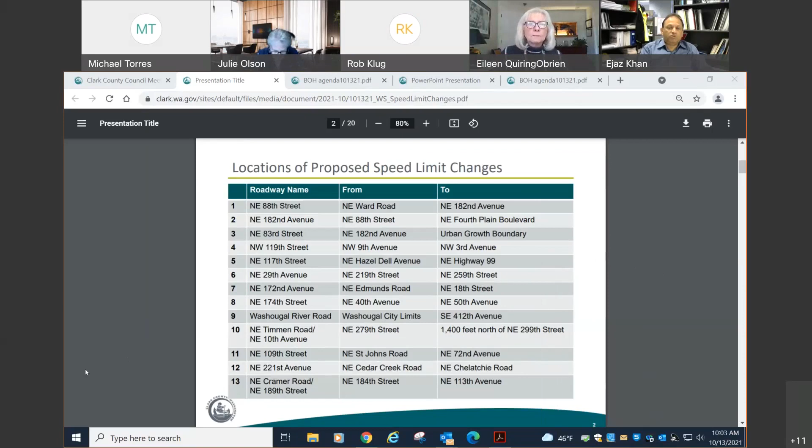We're going to talk about 13 corridor segments in Clark County that we are recommending changes in regulatory speed limits, and we will talk about each one of them individually. Next slide, please.

This is an overview of the segments in Clark County where we are recommending changes in speed limit. Next slide.

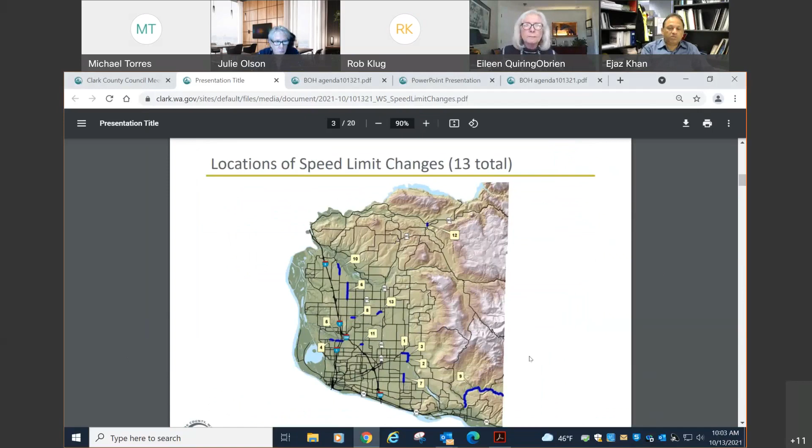So under state law RCW 46.61.400, the maximum permissible speed on a county highway is 50 miles an hour. That doesn't mean you can drive at 50 miles an hour. You can drive up to 50 miles an hour subject to conditions.

The majority of the rural highways in the county are basic rule, meaning it's unposted speed. The reason for that is there are so many vertical and horizontal curves, it's difficult to post a regulatory speed on a county highway and guarantee that it's safe to drive the entire corridor at that regulatory speed.

RCW 46.61.415 does provide authority to local agencies or jurisdictions to change regulatory speed based on traffic safety and operational conditions. And I want to say, if it is a regulatory posted speed limit, let's say 35, 40, or 45, whatever that may be, that speed limit sign shall be posted at the entrance to the corridor. Next slide, please.

Generally speaking, parkways, the highest category of roadway in the county, are 50 miles an hour. Principal arterials between 45 and 50, minor arterials between 35 and 40, and so on. But that doesn't mean this is the only speed limit that can be there. These are based on ideal conditions - if it was completely built and everything was per standard, this would be the range. But that is not always the case, and that is why we do a speed study, and sometimes it can deviate from what you're looking at here.

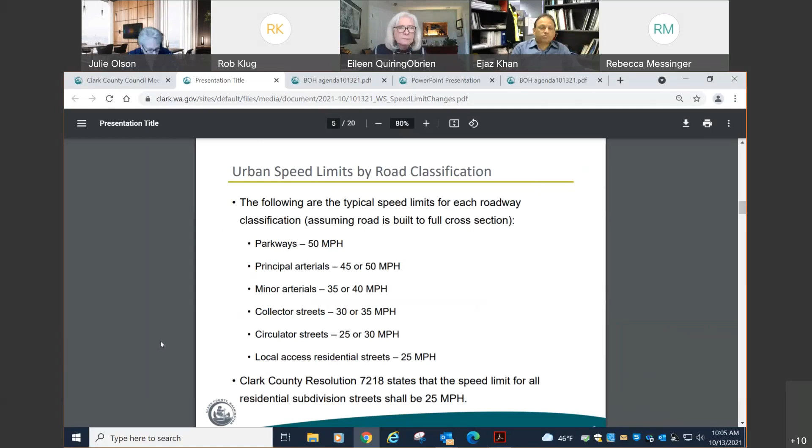Next slide, please. So the elements we look at while determining speeds - there are three basic things. The first is the highway, the physical condition of the highway. That means the geometric condition, such as lane width, horizontal or vertical curve, sight distance, anything associated with the physical characteristics of the highway. That's one element. The next element we look at is traffic, that's operating speed.

Within operating speed, we look at a number of things: what is the operational speed or 85th percentile speed, what's the pace, what's the percentage in the pace, and so on. We look at the vehicle mix, meaning the percentage of trucks and other classification vehicles. We also look at crash history.

The third thing we look at is roadway classification - is it arterial, is it collector, things like that. What are the number of accesses? Are the accesses like every 1,000 feet, or every 100 feet? What is the pedestrian environment? Is it urban? Is it rural? So we look at a mix of things before making a call on what should be the regulatory speed limit for that corridor or segment. Next slide, please.

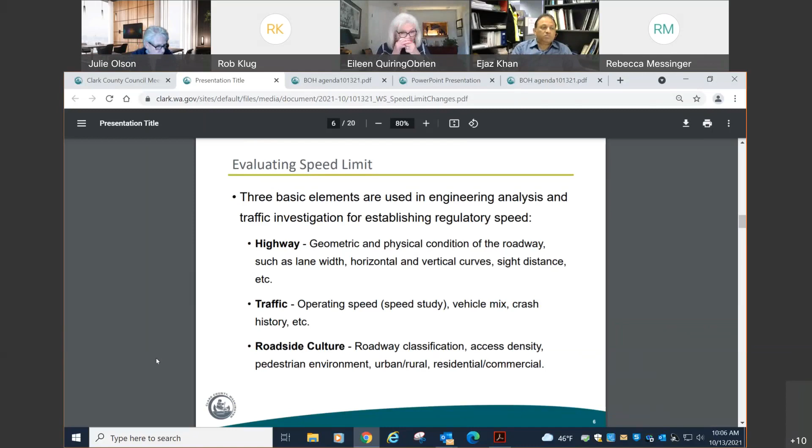The first one we are looking at is 88th Street, east of Ward Road. It's currently unposted basic speed limit, but there are a lot of residential developments coming in here, and since it's becoming more urban, we felt it necessary to change it from basic to a regulatory speed limit. Our original thought was that it would be best suited at 35 miles an hour. We collected the data and looked at everything else, but we could not justify a 35, so we settled on a 40 mile an hour speed limit, and that's what we are recommending for this corridor.

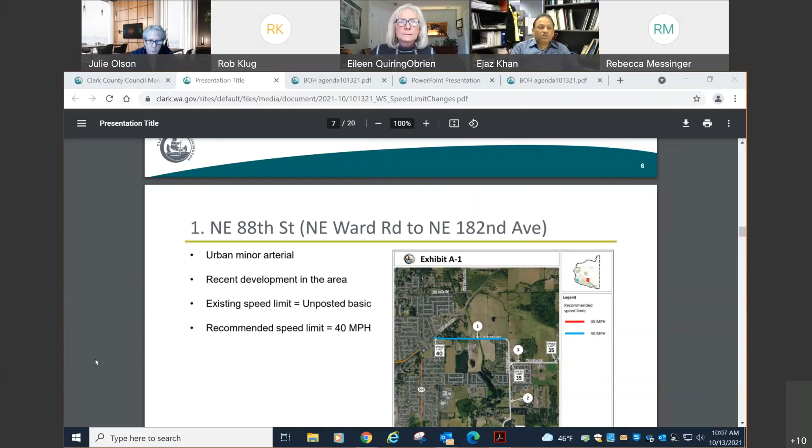The next segment is 182nd Avenue, a continuation of 88th Street that we just talked about. It is very similar in condition, and we had done the same analysis and speed study for that. Based on that, we came to the same conclusion that it should be 40 miles an hour. That makes sense because it provides route continuity. We don't want sudden changes in speed limit within a continuous corridor.

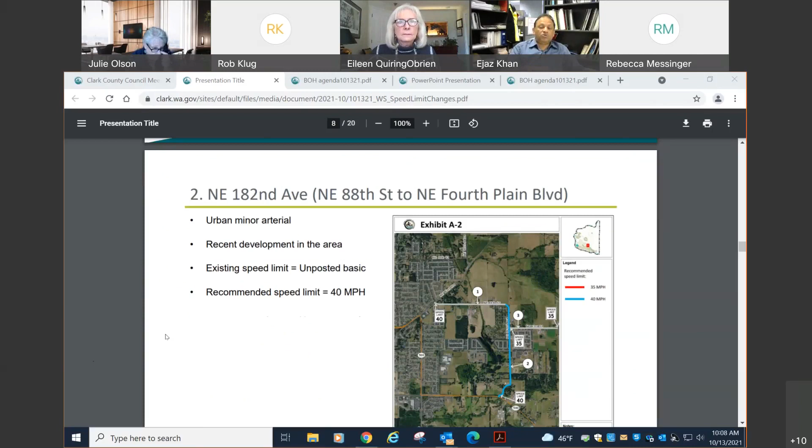The next corridor is Northeast 83rd Street, just east of 182nd Avenue that we talked about. This is a short section that is now in the urban growth boundary, and we have a large subdivision development that has come in at the southeast quadrant of 182nd and 83rd Street. This area is becoming urbanized, and for that reason, based on the speed study, we are recommending the speed limit be changed from basic unposted to 35 miles an hour.

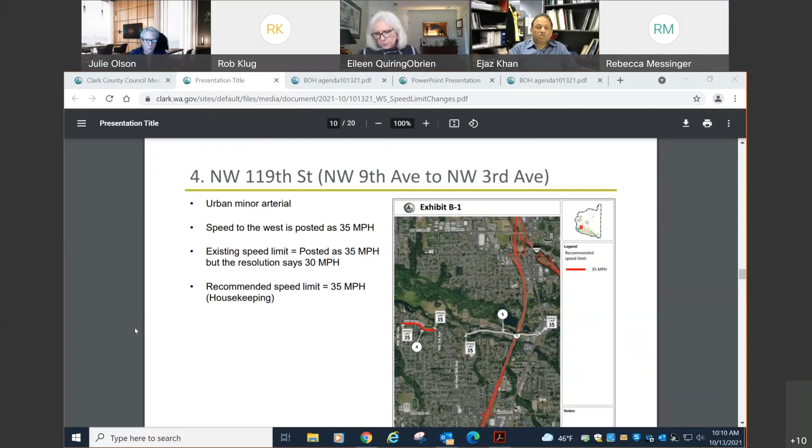The next one is Northeast 117th Street between Hazel Dell Avenue and Highway 99. This is a continuation, so there is a segment between 3rd Avenue and Hazel Dell Avenue off 119th Street that we are keeping at 30 miles an hour because there are lots of driveways and it's kind of on a curve. To maintain safety and sight distance, we are keeping that section at 30 miles an hour. But on the other side, we decided to make it 35 because nobody's complying with 30 -- the speed doesn't support a 30 mile an hour limit, and it's already posted as 35. So we are recommending that this segment between Hazel Dell and Highway 99 officially be resolutioned for a 35 mile an hour speed limit.

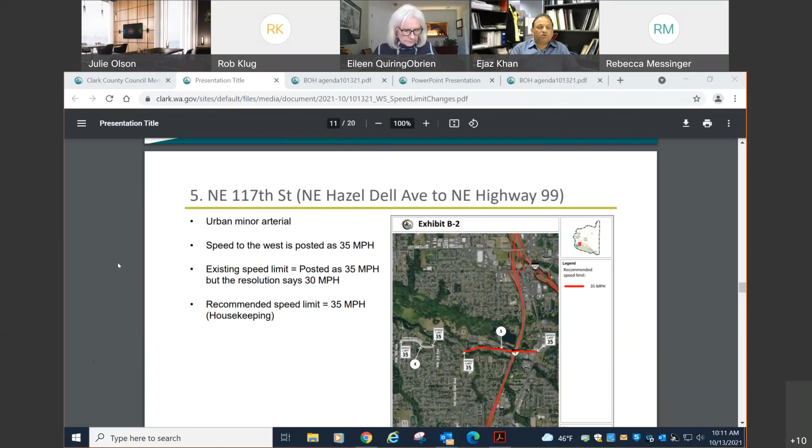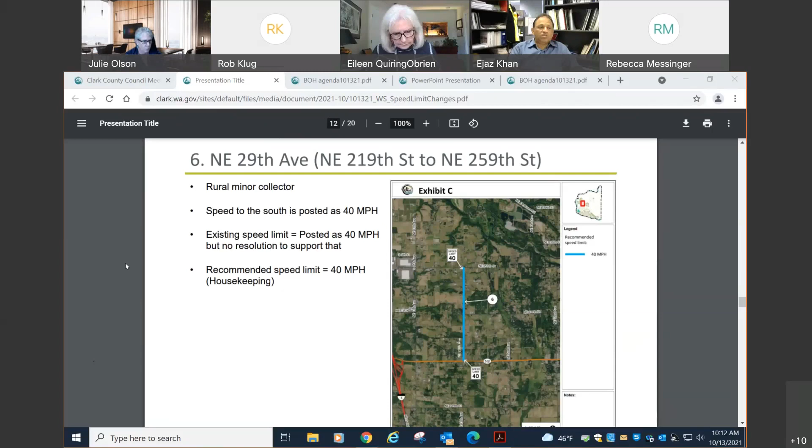Next slide, please. The next one is 29th Avenue, north of SR 502 or 219th Street, between 219th and 259th. This is currently posted as 40 miles an hour, but there is actually no resolution for it to be 40. Additionally, 29th Avenue south of 219th Street is officially 40 miles an hour. So in order to have a continuous, constant speed limit further south, as a housekeeping measure we are recommending that this corridor segment between 219th and 259th be resolutioned as 40 miles an hour. Next slide, please.

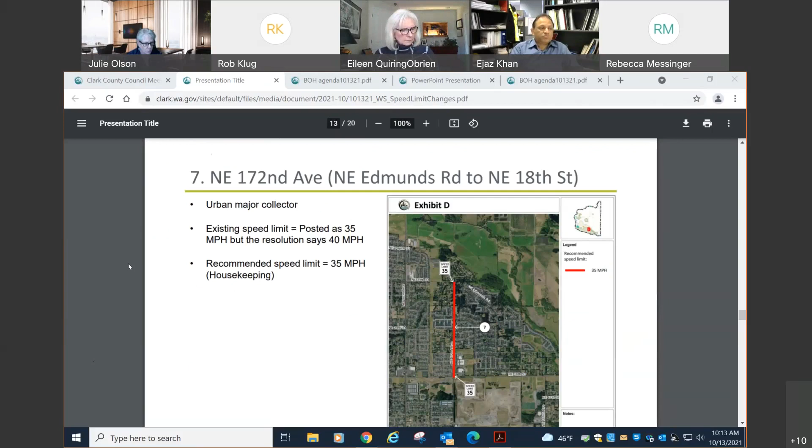The next corridor is Northeast 172nd Avenue between Northeast Edmunds Road and Northeast 18th Street. The existing speed limit is posted at 35 miles an hour, but the resolution for this says 40. This is an urban area that's completely built out, with an elementary school and a secondary school, Harmony School, located there. For that reason, we feel that 40 miles an hour is too high, and we would like to reduce it to 35 miles an hour. That's what we are recommending. Next slide, please.

The next segment is Northeast 174th Street, west of 50th Avenue, between 40th Avenue and 50th Avenue. Existing, it is unposted, but this is classified as an urban collector, and a lot of new developments are coming in. Because it's getting urbanized, and based on a speed study, we are recommending that this corridor segment be posted as 35 miles an hour.

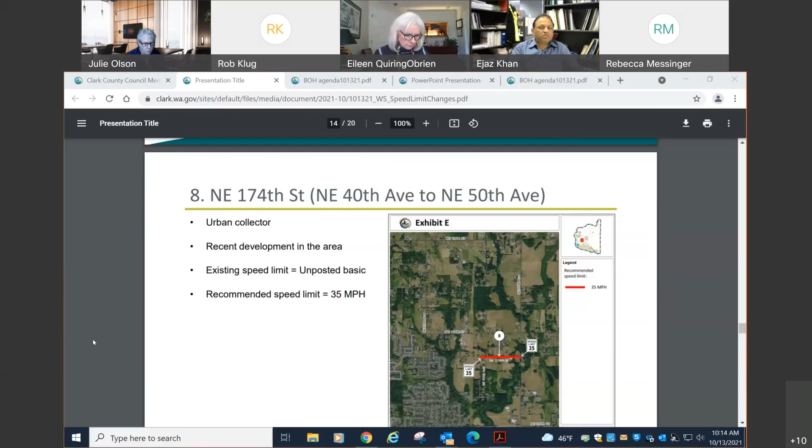The next one up is Washougal River Road. We inherited this corridor from Washington State Department of Transportation. When we inherited it, the speed limit was already 45 miles an hour, but it was never resolutioned by the county to make it official. For that reason, we are recommending as a housekeeping measure that this corridor, between city limits to 412th Avenue, be officially resolutioned as a 45 miles an hour speed limit corridor.

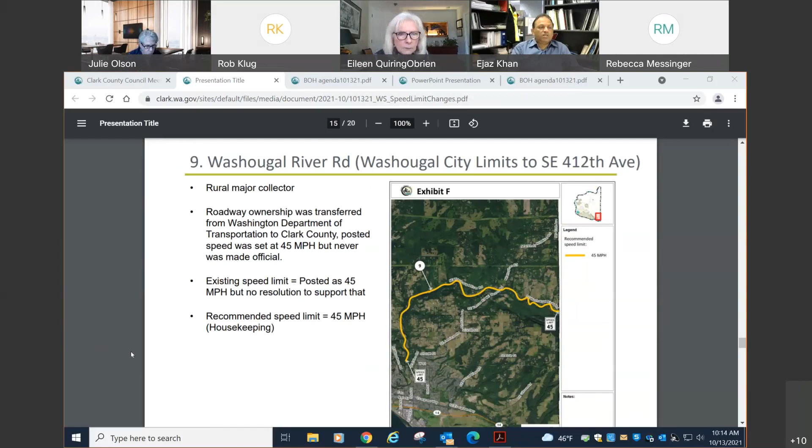The next one is Timmen Road, or 10th Avenue, between 279th Street to 1400 feet north of 299th Street. South of what you're looking at, the blue line is the city of Ridgefield, and they have it posted as 35 miles an hour.

North of where you're seeing the 40 miles an hour blue line, that is in Clark County, and that is posted as 40 miles an hour. Further north, the city of La Center, that is also posted as 40 miles an hour.

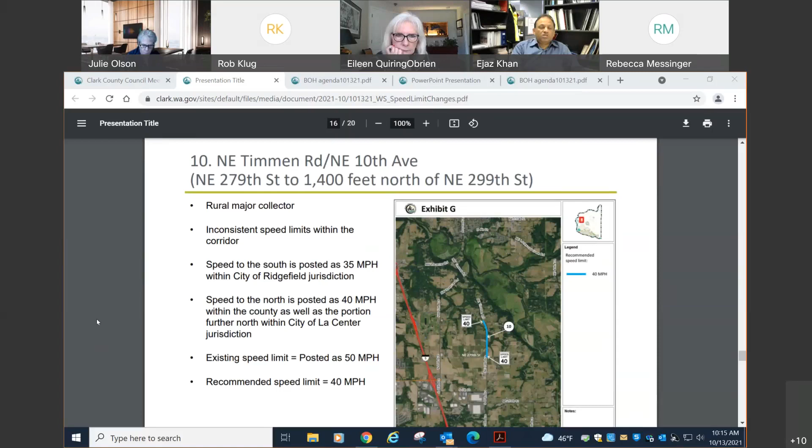So the blue section that you're looking at, that is the only section we have that's 50 miles an hour. It doesn't make sense to have a 40, a 50, and a 35. For that reason, in the interest of having consistency in speed limit on the corridor, we are recommending that this small segment be resolutioned as 40 miles an hour.

The next segment is Northeast 109th Street, between St. John's Road and 72nd Avenue. This is an urban local access road that functions like a circulator. It has a center line stripe, and doesn't have a lot of direct access like you'd see on a local access road. It connects two arterials, St. John's Road and 72nd Avenue.

Currently, it is posted as 25 miles an hour, but the resolution for this says 35 miles an hour. We feel that 35 is too high of a speed limit for a circulator street, and the speed study supports making this corridor a 30 miles an hour corridor. For that reason, we are recommending that the previous resolution be rescinded, and this one be recommended for resolution of 30 miles an hour.

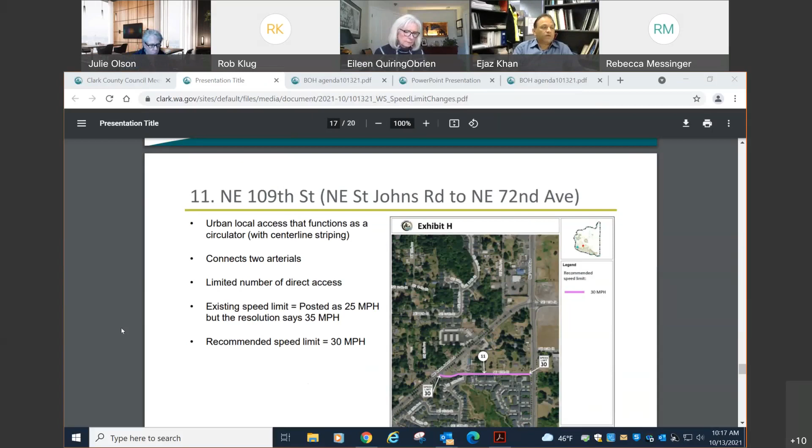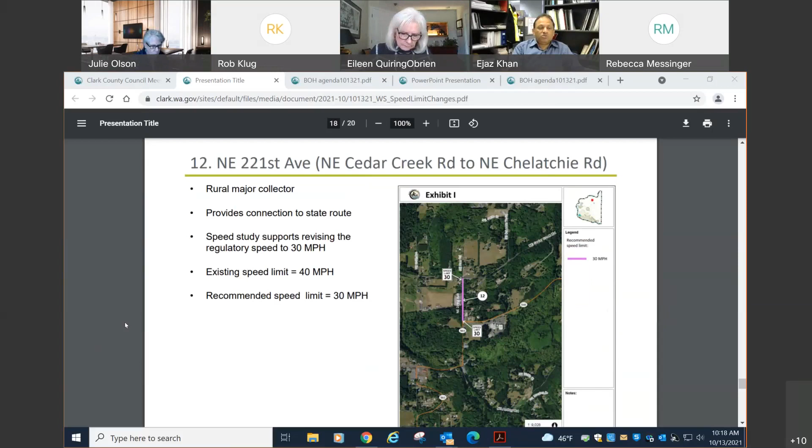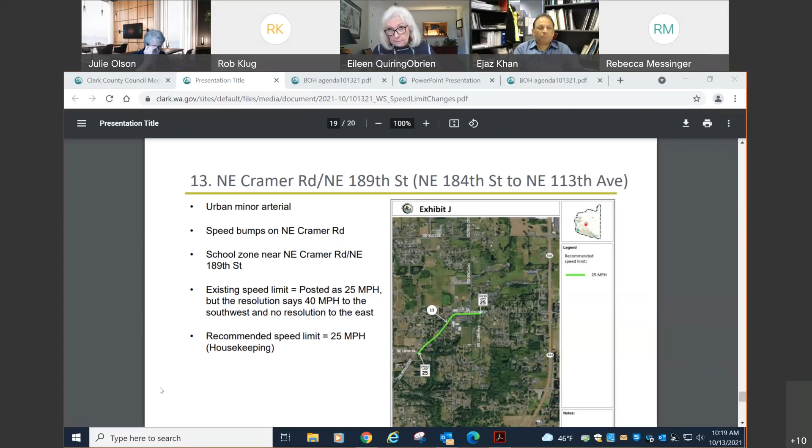Thank you, that was all. If you have any questions or comments on these.

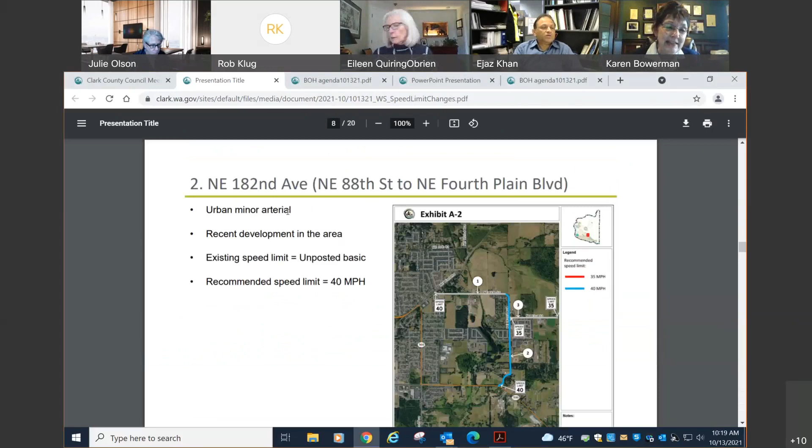We have questions from the council. Councilor Bowerman: Would you please go back to number 8? It's on Northeast 174th. Could you explain a little bit more why that reduction is to the extent you're recommending?

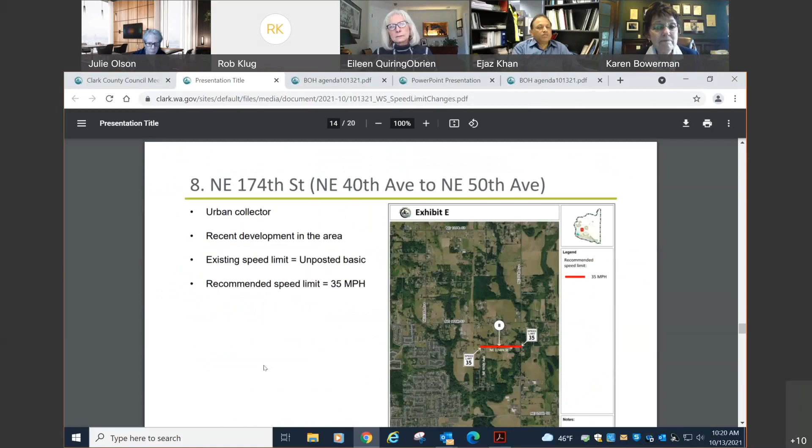There are two reasons. One is when you come up on 40th Avenue and look left and right, if it's 50 miles an hour, it's very difficult to obtain what we call the line of sight. Second, we did a speed study there that supported a reduction from basic to 35 miles an hour. Third, since this is an urban collector, urban collectors are typically not basic speed limit, and there are developments coming in there. For that reason, we are recommending this to be 35 miles an hour.

Will those developments likely be houses? Yes, that is correct. Okay, thank you. And just another question, since I've been hearing more about this from various constituents.

Do you look at the impact of speed limits or restraints on the road relative to street racing at all? No, that is more of an enforcement issue, the street racing and not following the rules of the road or violation of speed limit.